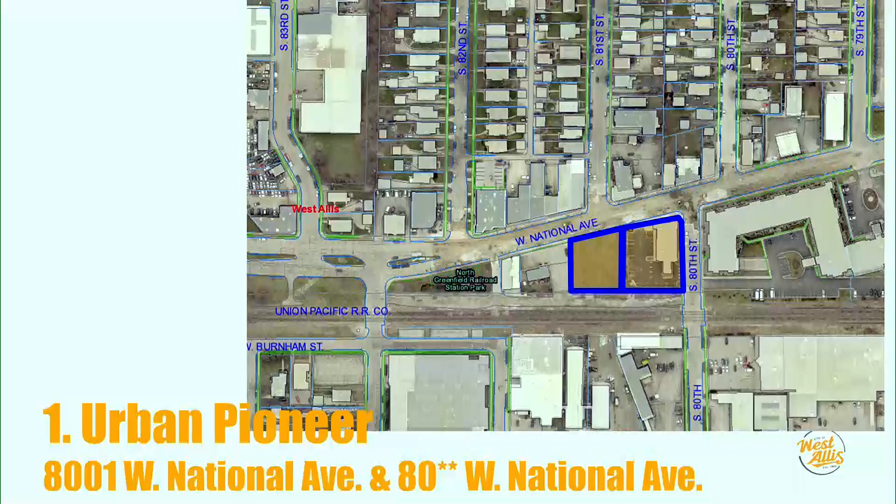It consists of 2 lots, a combined total of just shy of 1 acre of land. You can see it just south of National Avenue, north of the Union Pacific Railroad, and between 80th and 81st Street.

This is the former site of the Happy Hobby site, which unfortunately was demised by a fire back in 2012 on New Year's Eve, and then PyraMax Bank, which is currently on the corner of 80th and National. The site has been empty for a number of years, and the Happy Hobby site, that is, and PyraMax Bank is no longer in business. So the site is on the market for sale.

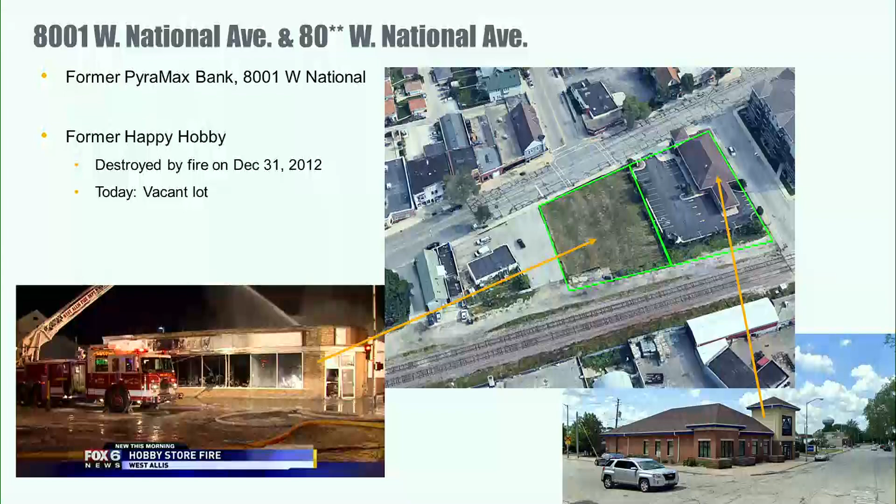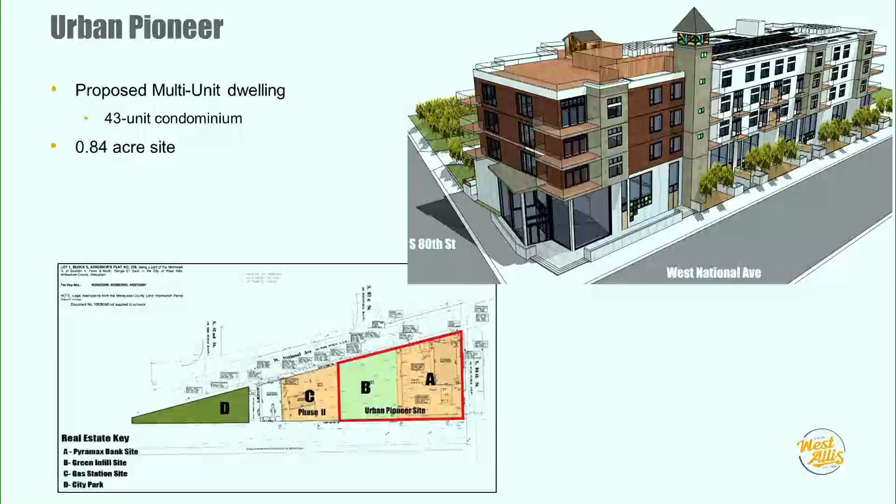We have a developer, TOD LLC, who is interested in redeveloping this for a multi-unit dwelling. It's 43 condominium units consisting of just shy of 1 acre. The form of the building is seen in the upper right-hand corner, and then sites A and B on the lower site plan would be occupied by this development. It would be combined via certified survey map to combine those 2 lots into 1 lot of record. And the zoning is C2, neighborhood commercial.

In our zoning ordinance, within that C2 neighborhood commercial zoning district, dwelling units of 5 or more units are considered conditional uses, which means it requires a public hearing before the Common Council because of the significance of the change to the neighborhood and to the alterations to the site.

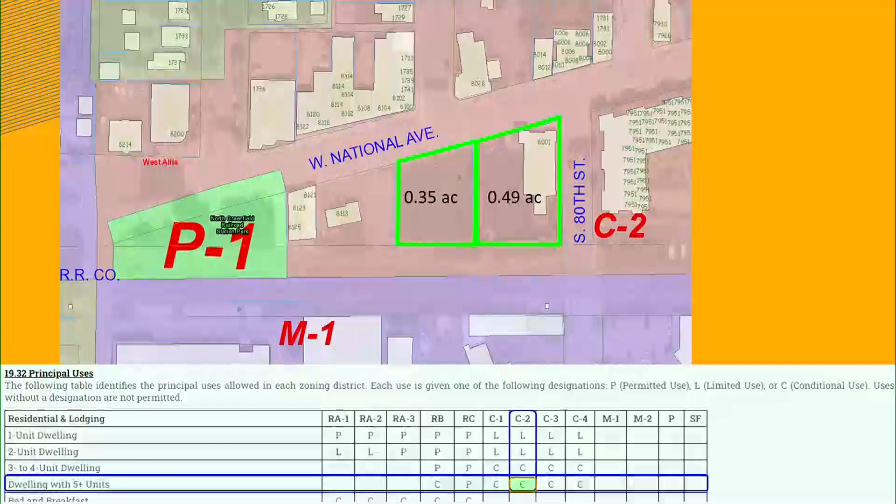The estimated cost is roughly about $17 million. This would be a taxable development, privately owned and developed. Again, consisting of that 43 condominium units, it would consist of 8 ground floor townhomes, 23 condominiums on floors above that, and then 12 micro units, which are roughly in the neighborhood of 500 square feet in area.

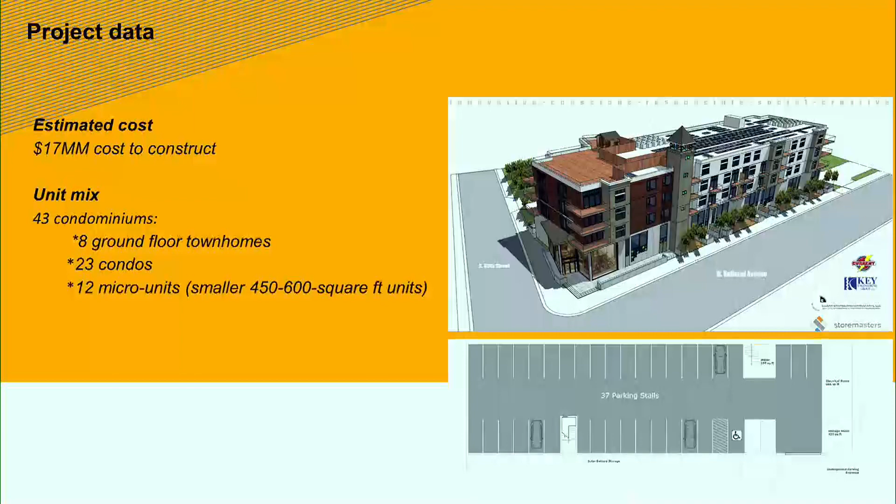There would be underground parking underneath the building, as well as surface parking behind the building. And then the 8 ground floor townhomes would have attached garage units accessible from the back side of the building. Just a view of the site showing the surface parking lots behind the building.

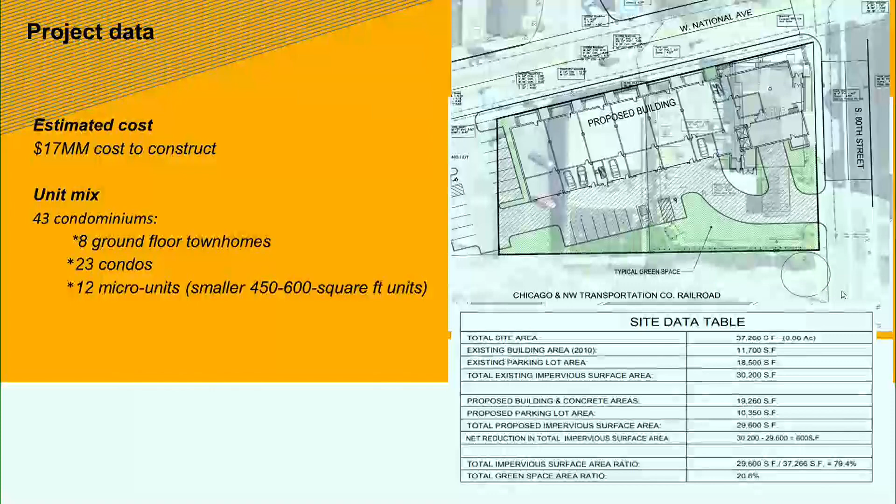The railroad is to the bottom of this site plan, National Avenue being towards the top. So as you can see from the site plan, the building does hug the street edge, fronting on National Avenue and 80th Street, with parking behind the building.

There would be patios for those walkout townhomes on the front side, National Avenue facing portion of the building. The surface parking behind the building would feature not only a landscaped area but a rain garden, so that surface water from that parking lot would be kept on site, drained on site, instead of sent off to Lake Michigan in a catch basin. The access to the underground parking is here on the lower right side of the building.

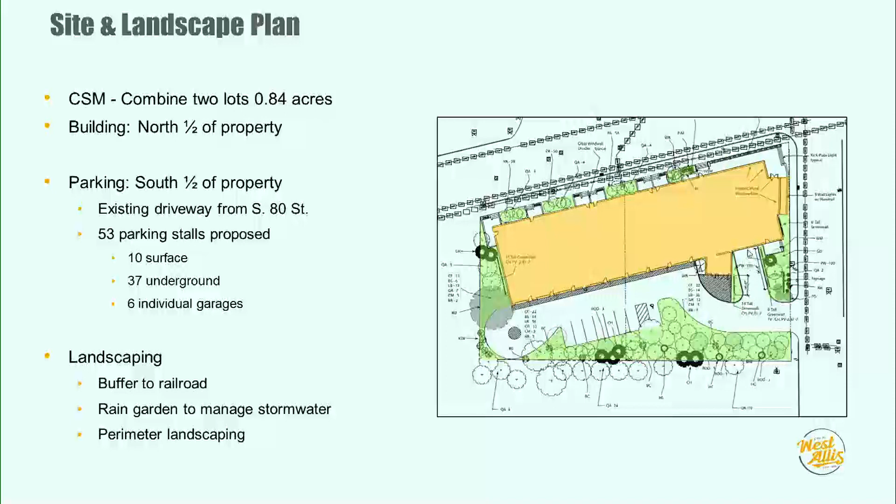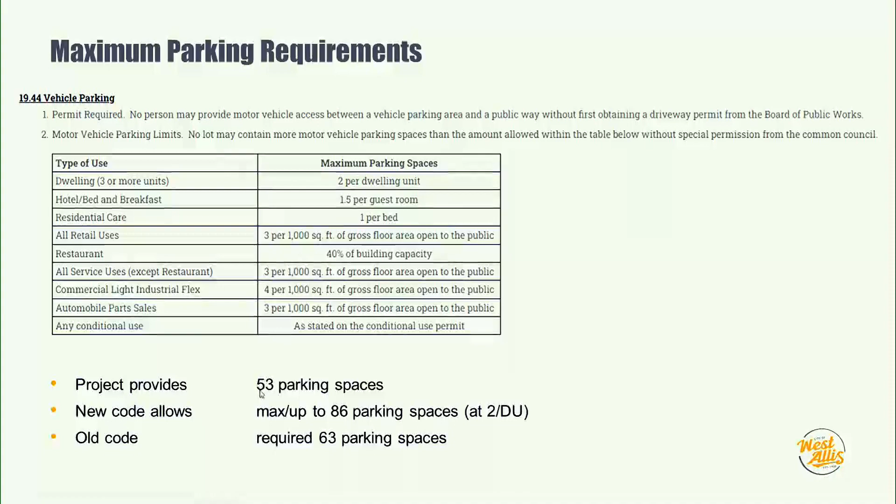Our new code considers maximum parking requirements, whereas our old code required at least a minimum number of parking stalls. Under the old code, we would require about 63 parking stalls for this type of development. Within our new zoning code, which encourages and requires a maximum, up to 86 parking stalls are allowed, at a maximum of 2 parking stalls per dwelling unit. This site proposes 53 parking stalls, under that 86 stall maximum.

The building in total is just over 87,000 square feet, and at the highest point, which is the tower on National Avenue, it's about 77.5 feet tall.

The architecture of the building is inspired by the old schoolhouse on 84th and National Avenue, which is now our historical society. The building, fronting on 2 street frontages, activates the street front of both National Avenue and 80th Street, following best practice in urban design in terms of interaction with people walking along the sidewalk, as well as the impression you get passing by in a vehicle.

It will feature unique design elements, including the tower feature with a stained glass upper element. The lower patio portions of the building are reminiscent of older industrial buildings in the city, with older shop windows and different color tints on some of the glass panels. That lower floor is roughly 20 feet tall, a little taller actually, and it features 2 floors.

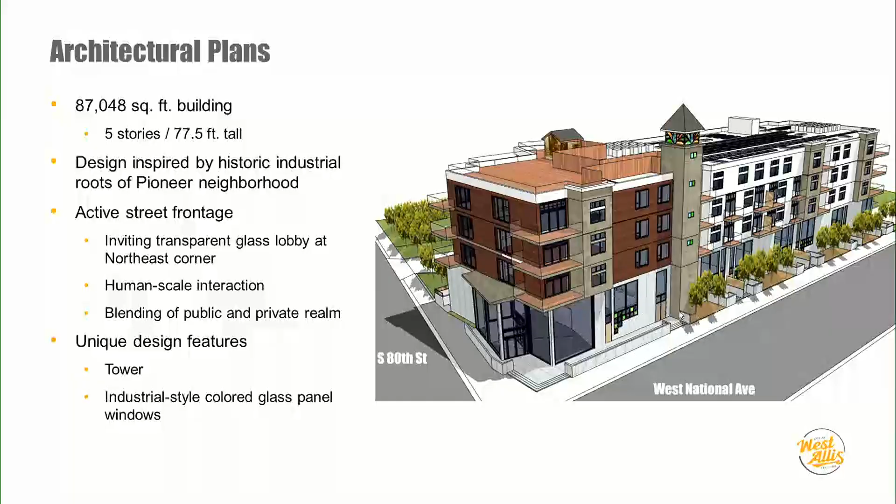If you purchase a townhome unit on this lower level, you're actually purchasing your ground floor, first floor, as well as a second floor loft above. We'll get into the floor plan in a second.

Going around the building, the front facing National Avenue is what we're looking at: a blend of materials with a cementitious wood-look siding, moving on to cementitious Hardie plank siding on other elements in different varieties of color.

There would be a smooth finish concrete precast finish on the lower 2 floors of the building. Wrapping around the back side, you see the balconies continuing around, along with the attached garage units for the 6 townhomes below, and access to the underground parking here.

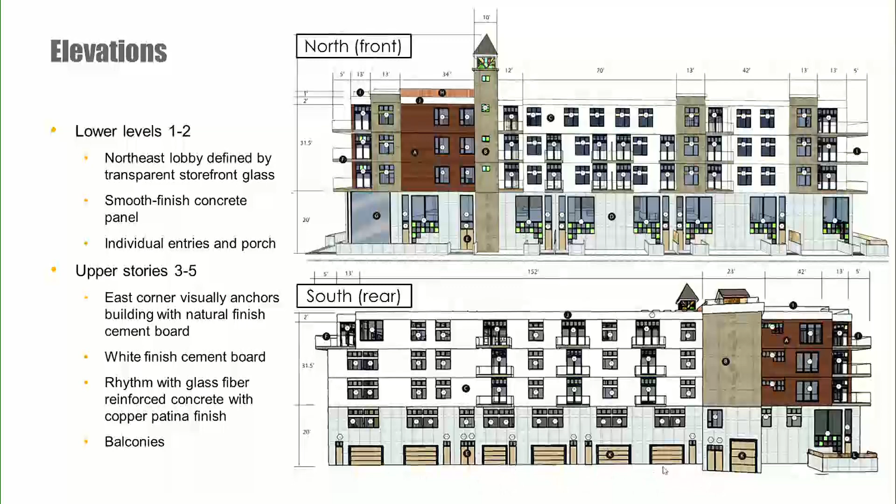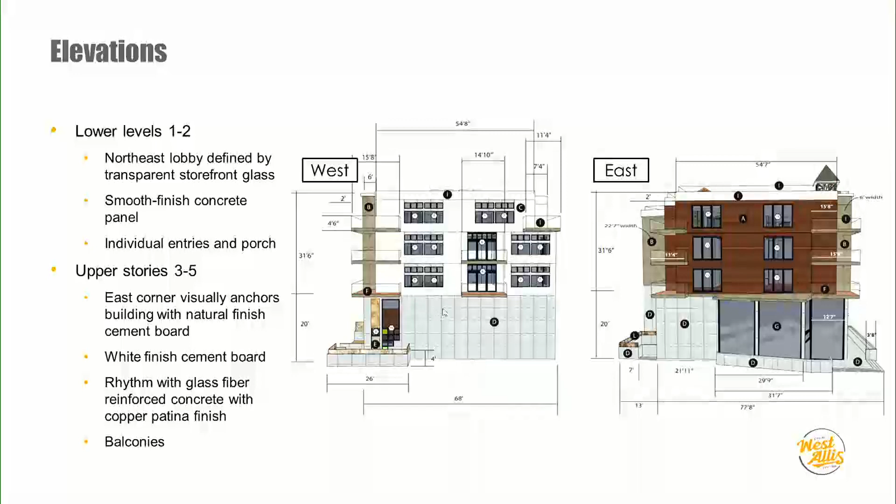The side elevations: east and west. The east side faces 80th Street and the Heritage Senior Community across the street—this is what it would look like from that vantage point. From the side to the west, where the Flower Girl is located, looking eastward you would see this elevation of the building.

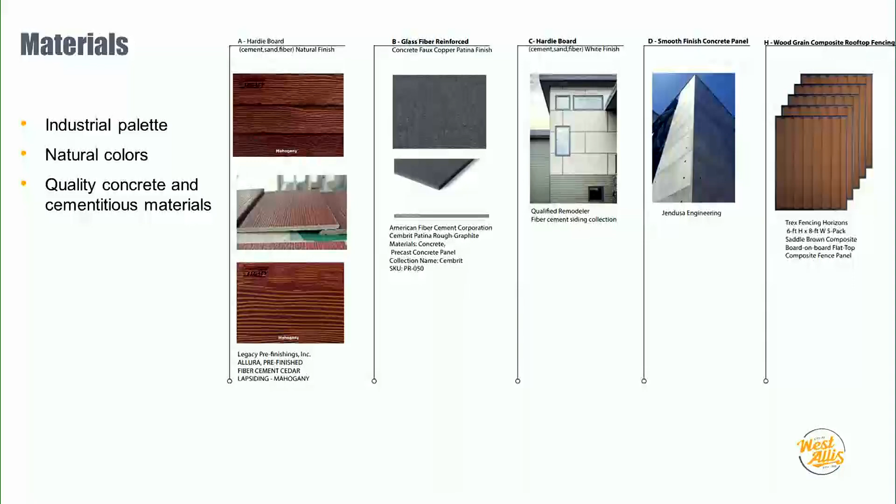This is a palette of different exterior materials in the building. The architect is trying to evoke an industrial look with the window types and the tower feature reminiscent of the old school, giving it a historic flair in terms of both industrial and neighborhood history. The wood or cementitious wood-looking siding introduces some warmer elements and colors to the building's exterior form.

The range of unit types includes townhome units, shown in the far left-hand column: townhome with garage, a micro condo unit at about 500 square feet, and then the different condo types, A through D. The unit mix is roughly 17 two-bedrooms, 5 one-bedrooms, 21 efficiencies, totaling 43 units.

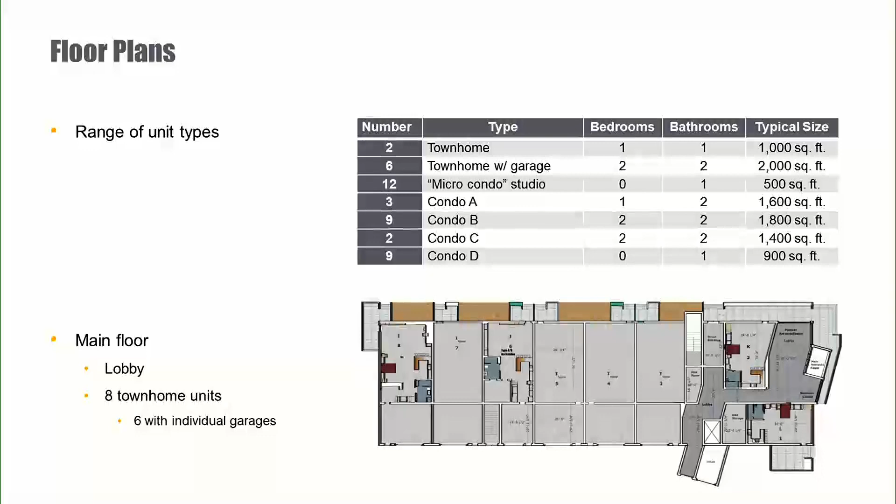The main floor and second floor will have common area amenities, including a fitness area, indoor bike parking, and a lobby area for gatherings. There will also be an elevator servicing all floors.

As an example of the floor plans on the first and second floors, the ground floor walk-in townhome unit is accessible from your attached garage space, from National Avenue, or from the lobby area on the northeast side of the building.

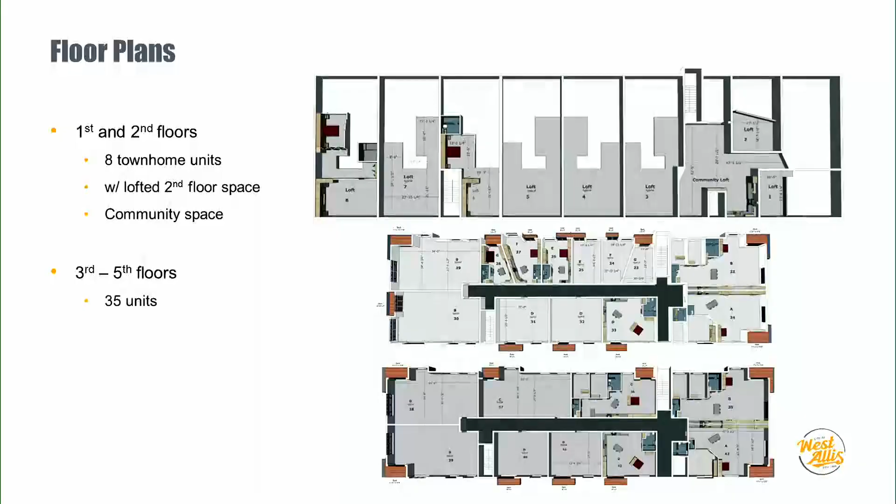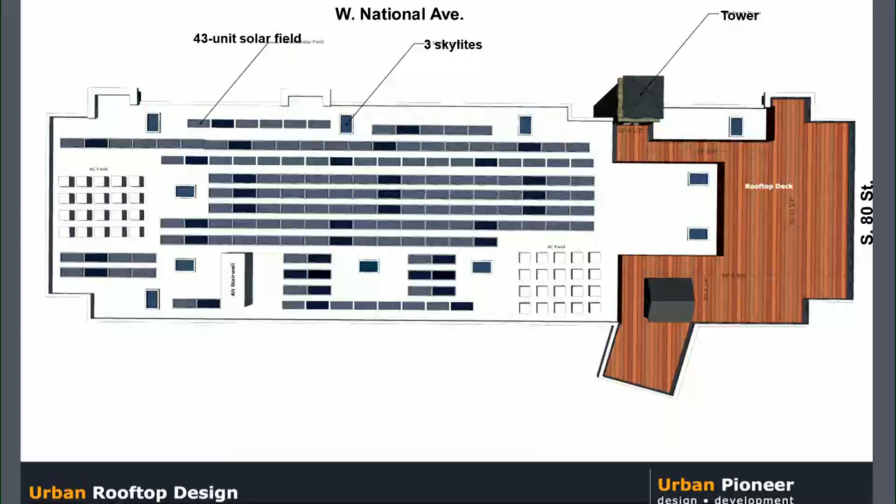If you go up to the second floor loft of your condo, you'll have an open view to the floor below. Up on the 5th floor, the uppermost floor, there would be a rooftop deck, and the developer is also considering solar panels, a solar array on the rooftop, along with skylights and other sustainable features as amenities to attract rental and purchasing of units in this market.

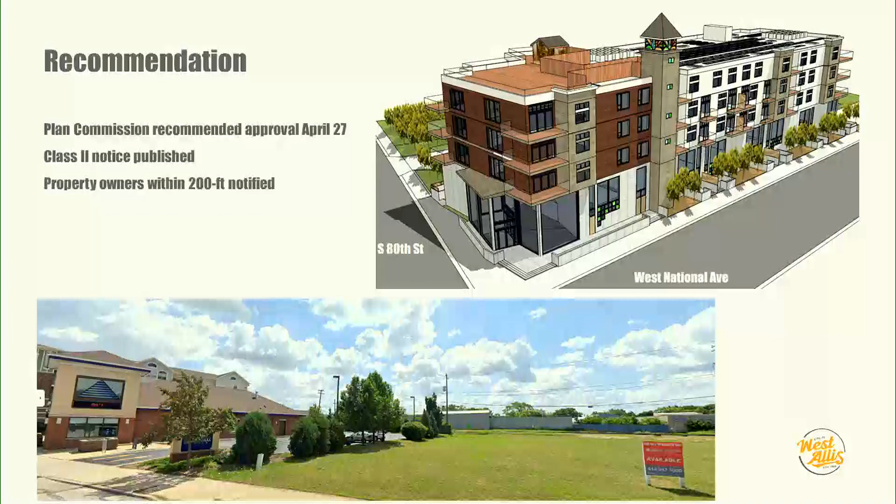Plan Commission has recommended approval on April 27th. Class 2 notice has been published in the official paper as well as mailed to properties within 200 feet. I'll open it up for questions at this point, and thank you.

Thanks for the presentation, Mr. Scher. Are there any questions from the Common Council on this item?

Alderman Weigel: unless there be substantial changes to this proposal, is this the only public hearing on this project? That's correct. It's my understanding they don't control the property yet, but they're looking forward to making some acquisitions in the coming months. There's still a few things that need to come together, exactly that, combining the properties and acquisition.

And then potentially some financing mechanism. Okay, thank you. Sure, thank you. Any other questions from the council?

Alderman Rote: Steve, I may have missed it, but I know there's 8 attached townhouse garages. Is there underground parking, or is everybody else on the surface? There's a combination — attached garages for the townhomes, but also 37 underground parking stalls. I should have included a cross section, but there's a ramp down to the lower level. Thank you. Any other questions from the council?

Seeing none, are there any questions on public hearing number 1 from the members of the audience? Go ahead.

Hi, my name is Kevin McFadden. I am the owner of the building two doors to the west of this proposed project. I'm also a multiple property owner in the city of West Allis. I've lived here for 60 years, and 35 years on the east end.

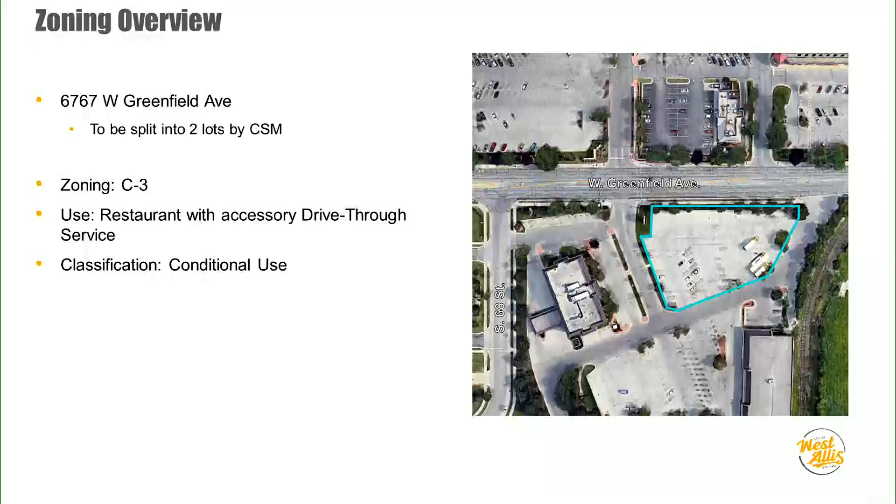The bank has been around since the 1990s. They've identified this lot east of them as surplus land. They'd like to lease it to Taco John's, a Tex-Mex or West-Mex chain of restaurants with about 400 locations in the States, and they have 2 stores opening in the area, with 10 additional locations in southeastern Wisconsin in the next 3 to 4 years. So they picked West Allis as one of their first. The project cost is roughly about $1.3 million, and it's about a 2,500 square foot building.

This is the site layout. Greenfield Avenue is at the very top of your screen here, and what surrounds this are parking lots. You have the Pick and Save to the south and Tri-City to the west. These are just private drives that wrap around the new lot that would be created. There will be 2 internal access points to Taco John's, so there will be no new access points into the site along Greenfield Avenue here. There's an existing one here and one here.

Access into the Taco John's site would be here on the south end of the site to a double-stack drive-through lane, and then here on the west side, which wouldn't prevent entrance but would primarily be used for exiting. There would be a surface parking lot with roughly about 20 parking stalls. The site would feature a small outdoor patio for a number of tables and chairs, and the drive-through window is on the north side of the building.

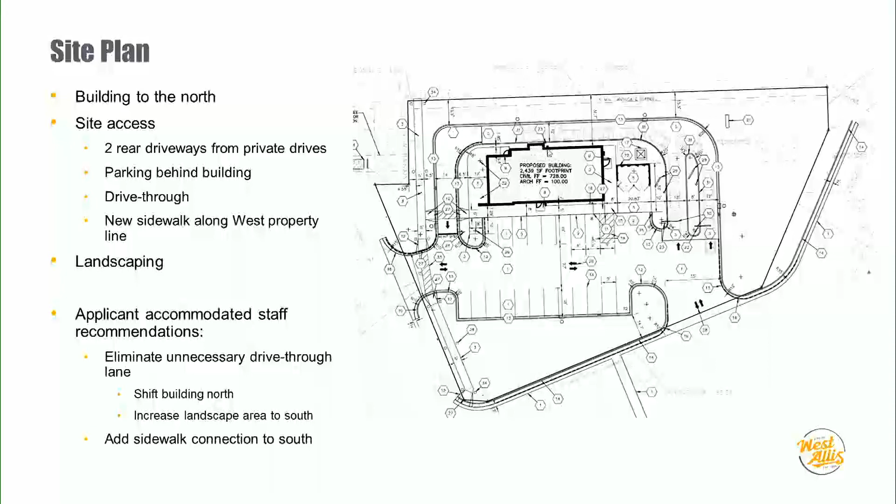The site will be landscaped. A number of the trees on the site will be maintained, however some will go away. The ones along Greenfield Avenue are on their last leg and will be removed and replaced with new honey locust trees. Underneath and between those trees will be perennial landscaping, wrapping around the drive-through area to create height and screening while maintaining a nicely landscaped street edge along this site. There's other lawn area and landscaping around the rest of the property, somewhere in the neighborhood of 30% landscaping.

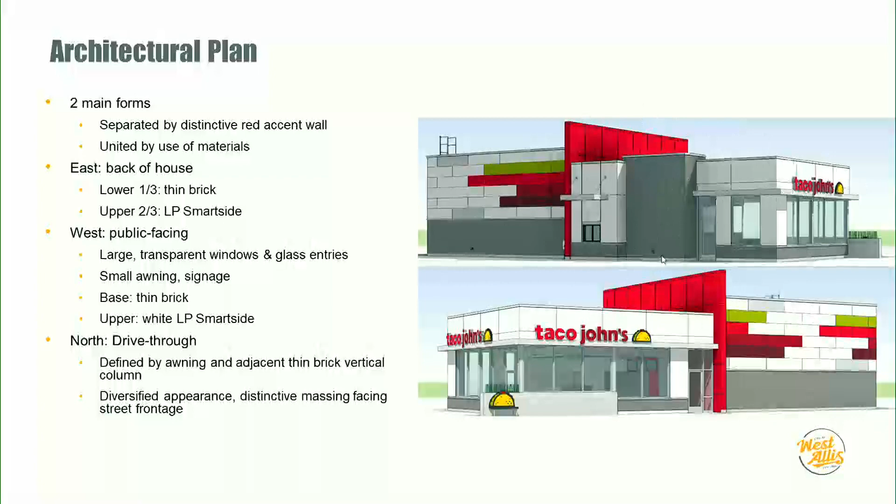This is the example of the architecture of the building. It features cementitious LP SmartSide on the exterior. The Plan Commission recommended increasing the amount of brick on the exterior, which was added and is shown here, roughly about 7 to 8 feet of brick along the drive-through area. There's a panel separating the back of house portion of the building from the front of house where the public comes in, and more brick in dark gray wrapping around the exterior 4 sides of the building.

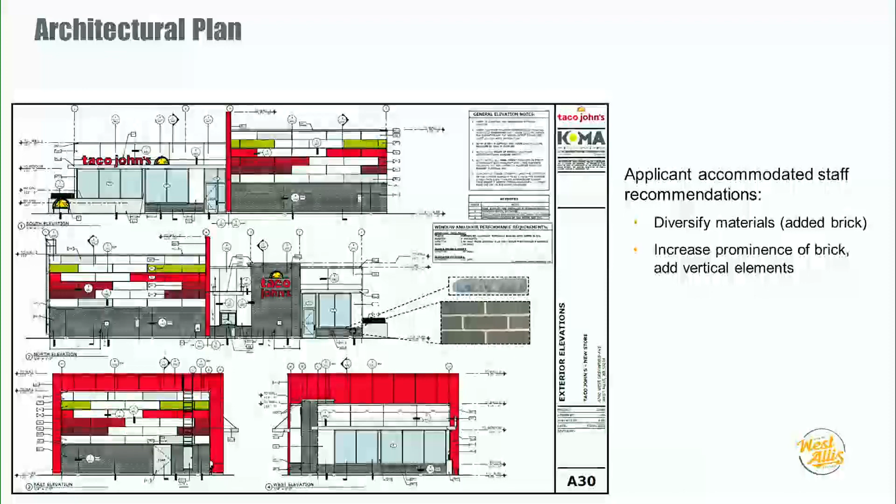There are a number of windows in the exterior of the building as well, which certainly allow natural light in, and it will feature a bit of a different branding color of reds on the exterior. And just another view of the exterior.

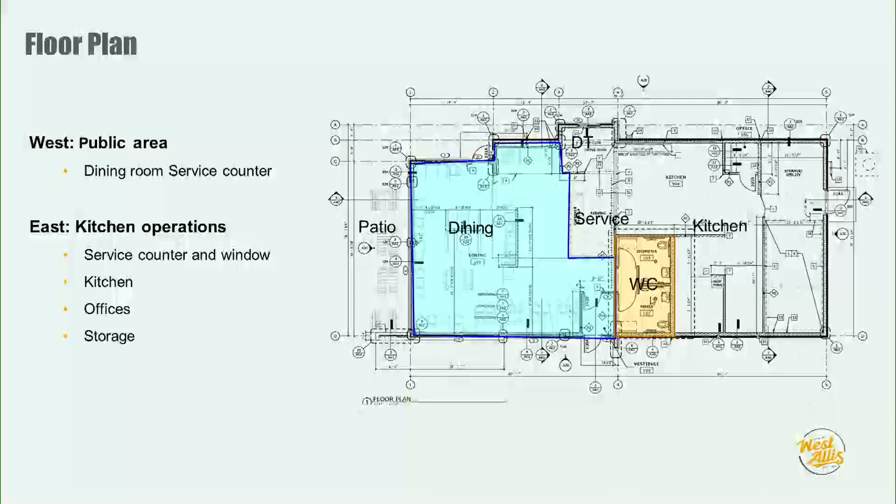The interior floor plan: the blue area in the front is the dining room, public space, and then the service counter behind that, drive-through window on the north side of the building, and kitchen/back of house on the east side. The orange area is the accessible restroom.

Plan Commission has recommended approval in May, and a Class 2 notice has been published. Property owners within 200 feet have been notified, and to date have received no objections.

Are there any questions from the Common Council on public hearing number 2? Alderman Weigel: Steve, I saw a patio, exterior - there's like 3 exterior tables?

Yeah, we can get more details, but it appears to be about 4 exterior tables with 4 seats per table. What side of the building is that, the west side? It would be on the west side.

And I don't see the bike racks? The bike racks are on site. Let me see if I can find them on the site plan - it was noted, I think, right here, in this location.

So how close to the front door are those? That's one of my pet peeves - when I go somewhere on a bike and the bike rack's in the back by the dumpsters or something, you know?

All the parking stalls are about 9 feet wide, so 27 feet. Okay, thank you. Any other questions from the council?

Are there any questions from the members of the audience?

Do we know the hours of operation, what time they open, what time they close, late night, that type of thing? Sure, I didn't cover that - let me take a quick look. I've got the resolution here. The hours of operation will be from 7 a.m. to 10 p.m. daily.

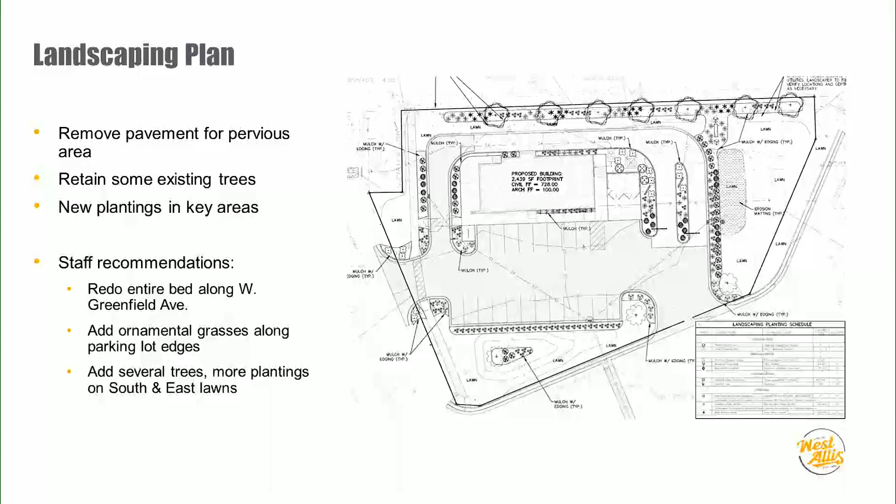Thank you. We know Casey, we don't need his name. Any other questions on public hearing number 2?